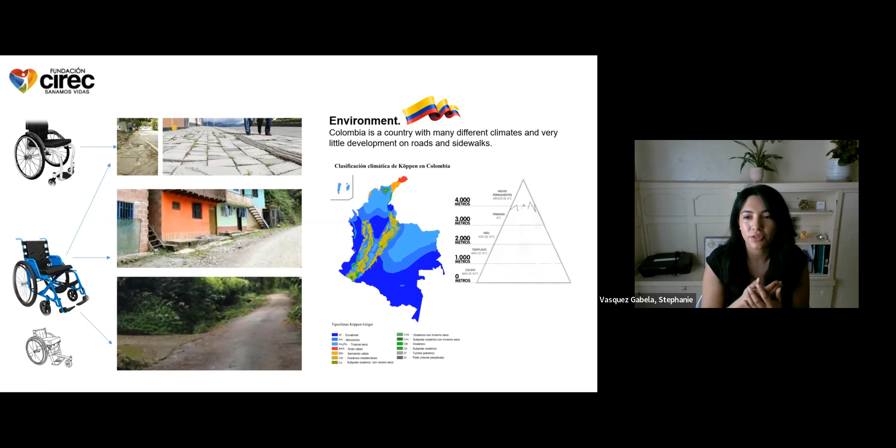The conditions would be like - you typically have a lot of grass that has grown a lot, mixed with wheat, that kind of texture. So it tends to be difficult, and even the conditions on the skin of the people can be a little bit rough because of the coldness. So we have all the climates you can imagine, from 24 to 35 degrees Celsius up to the really high mountains.

In CIREC, we provide from active wheelchairs to tilting wheelchairs. And we work with the Free Wheelchair Mission, and we provide those blue wheelchairs you've all seen, I'm sure.

We're trying to make a hybrid between the free wheelchair mission wheelchair and an active wheelchair. If you can see on the top image, this is Bogota. We don't have the best sidewalks, and there's not much infrastructure for wheelchairs, so people tend to share the road with other vehicles.

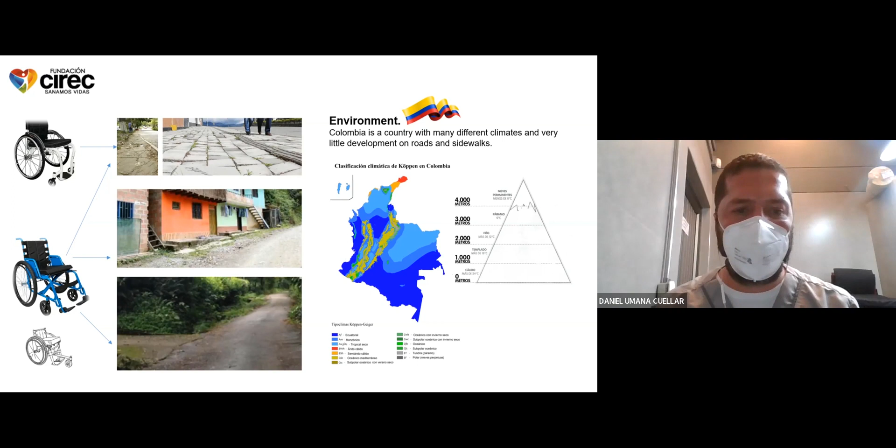In the more rural areas, we have basically no roads, and in some places not even sidewalks. So we have to work around and develop designs and configurations of the wheelchair so that they're appropriate for all these types of environments.

So we've separated what we're doing right now into 3 phases. The first phase is the wheelchair design, which is how to take patient measurements, if it's tapered or non-tapered, the design itself, if it's going to be 4 wheels or 3 wheels. The second is wheelchair fabrication, identifying which machines I'm going to need for machining, welding, and painting. The third is wheelchair testing, which we've only done alignment testing and center of gravity testing so far.

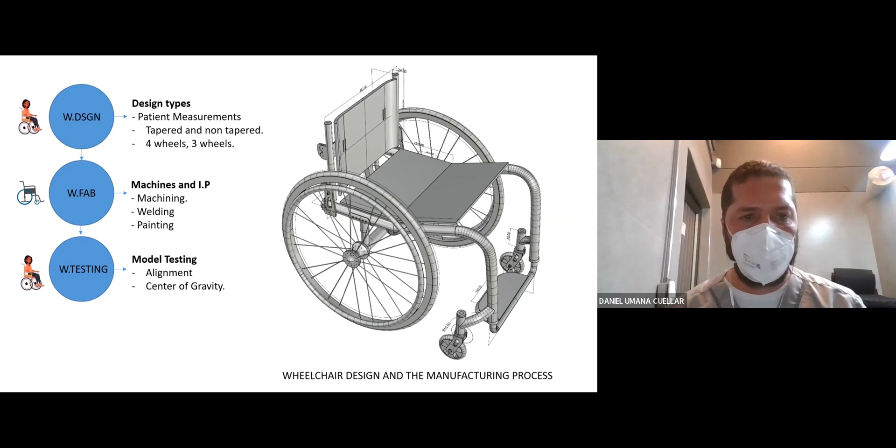The first device I'm going to show you is the wheelchair measuring device, which I'm designing. The second thing I'm going to show you is how we identified the industrial process to manufacture those wheelchairs.

We did 2 prototypes, steel prototypes, handmade. As I told you, I used to work in the bicycle industry, so I have some experience, and I made these handmade wheelchairs using steel just to prove to my boss that we can do this without technology. What could we do if we have the technology that's needed?

So we're also developing the production line and the possible machining solutions. We've designed a welding jig, and I'll show you at the end the hybrid wheelchair design that we're working on.

This is the first design we made for the wheelchair measuring guide. We've had a lot of problems. In Colombia, there aren't so many places where you can go and get those measurements taken, and there's been a lot of mistakes, so we're trying to develop a product that can minimize the amount of error while taking those measurements.

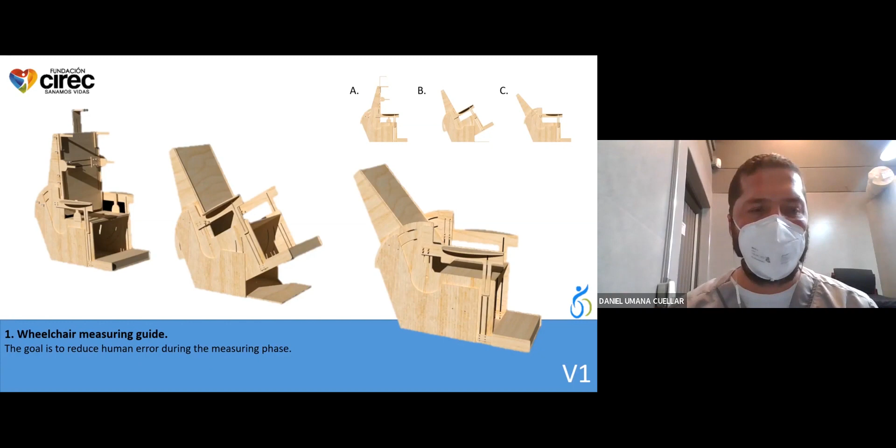This is a basic design which can tilt and can basically fit the user, and then we can take the measurements using those boards you see here. So we can change the width and take the measurement on a straight line.

We've had a lot of problems, as I told you, with the measurements. Sometimes people say add 2 inches, add an inch - it's not really standard. So that's the purpose of this product.

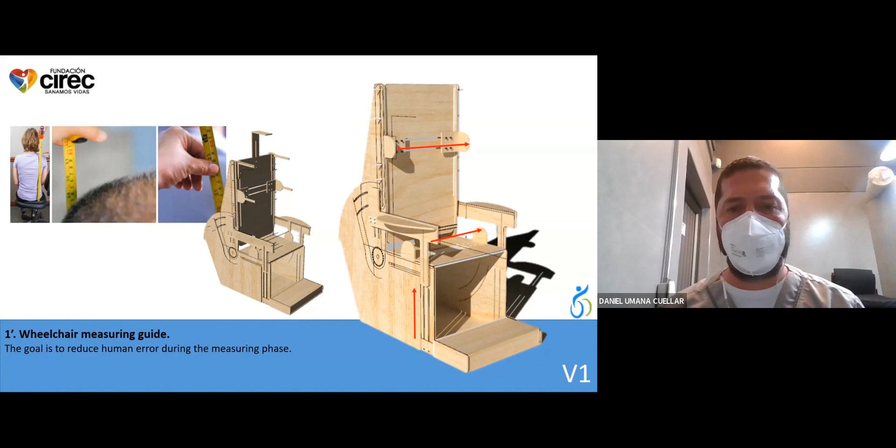This is the second prototype we're trying to work on, a lot simpler without the tilting possibility. But again, we're trying to get flat zones so we can take the measurement flat to flat without using any other aid, and that way we can get a more precise measurement.

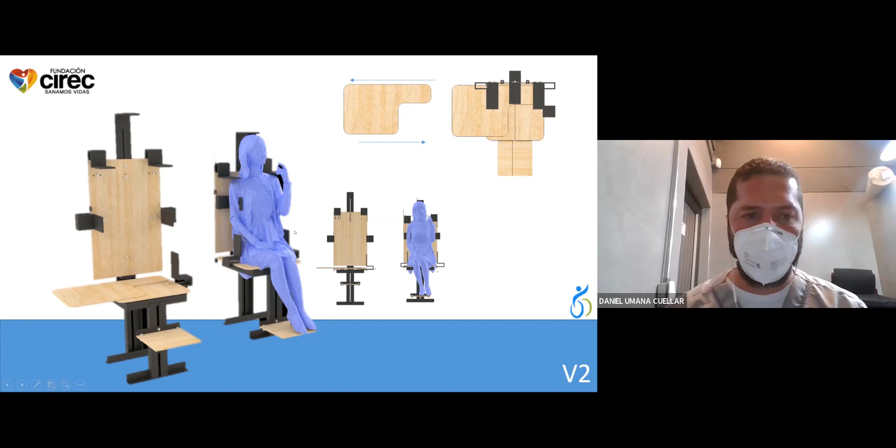This is what we're trying to work on. Our design is simple right now, just focusing on how to build these designs and which machines we're going to need to buy to be able to produce these wheelchair frames.

The basic thing is bending those tubes, bending the frame. How to build that pin or control mechanism has been a really hard part. The center of gravity - how can we change that without making the wheelchair really long? That's been another challenge.

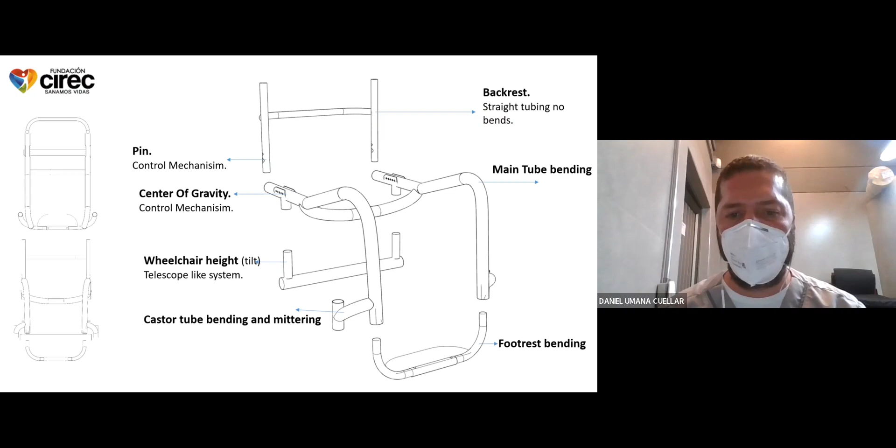The wheelchair height, which will determine that tilt, has also been a challenge, and the caster tube bending and mitering of the tubes was another challenge we experienced. So as you see, it's a basic design.

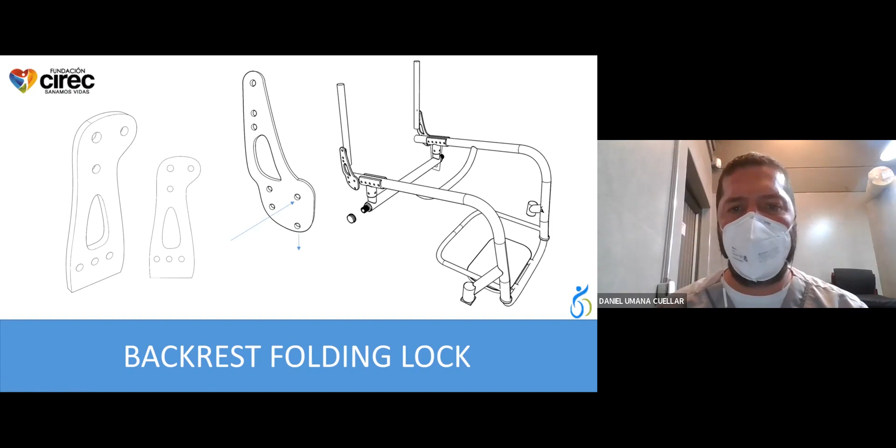I'll show you some of the prototypes we've made. We've also made this, I call it a folding lock, so we can fold the backrest and make that wheelchair easier to transport.

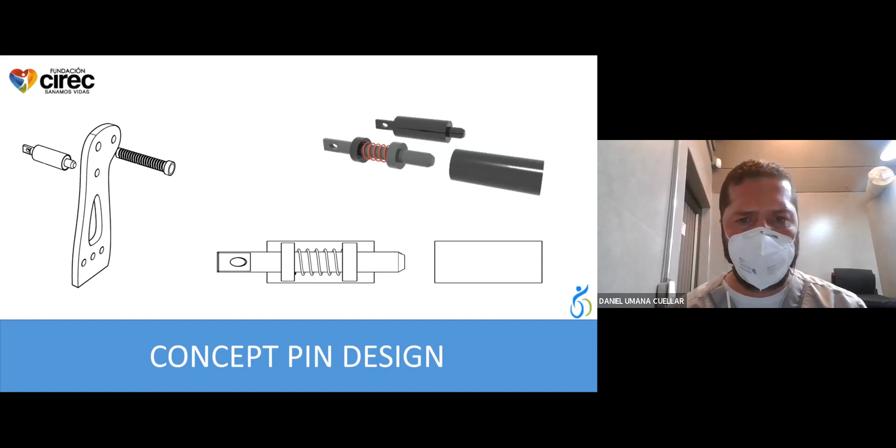This is our pin design. We had a lot of problems making that pin and making it work. Our boss told us to try to build it ourselves so we don't have to buy as many accessories. So we're trying to design and build the pin ourselves - it's a basic pin just to control the backrest.

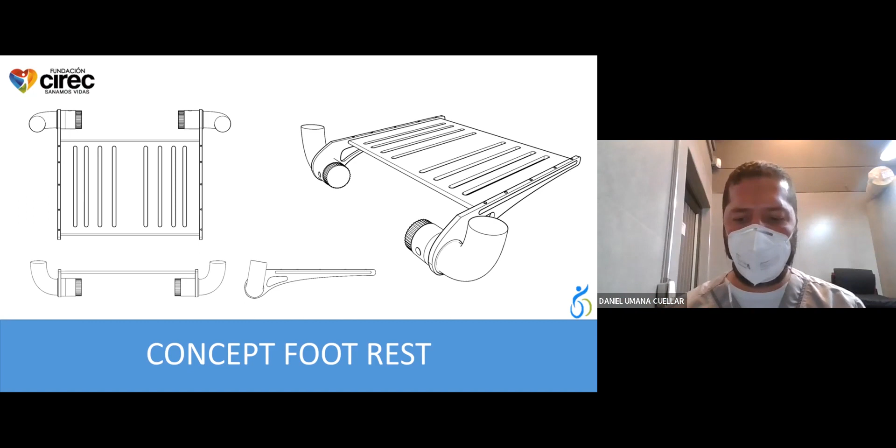This was a prototype we were working on for the footrest, basically having that tibial tarsal alignment as well, and the basic wheelchair that we're working on.

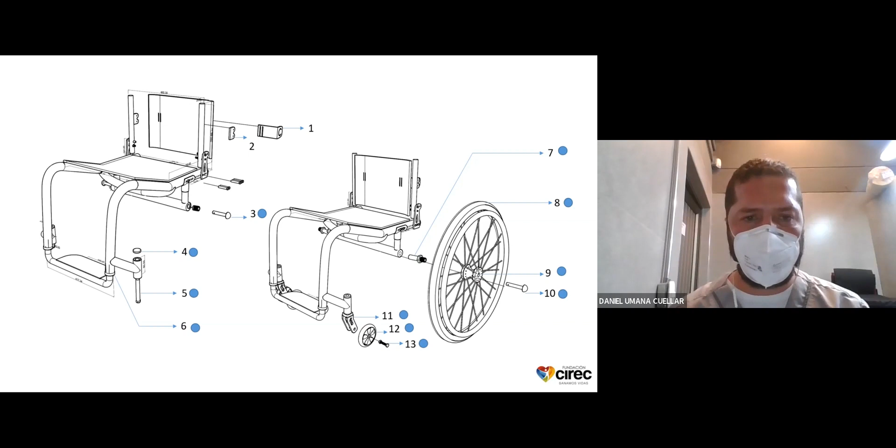Trying to separate each piece that we're going to need to build - how many screws, how many pins, how much tubing we need for the testing. And by testing, I mean the testing of the welding process. So separating everything and trying to get every piece.

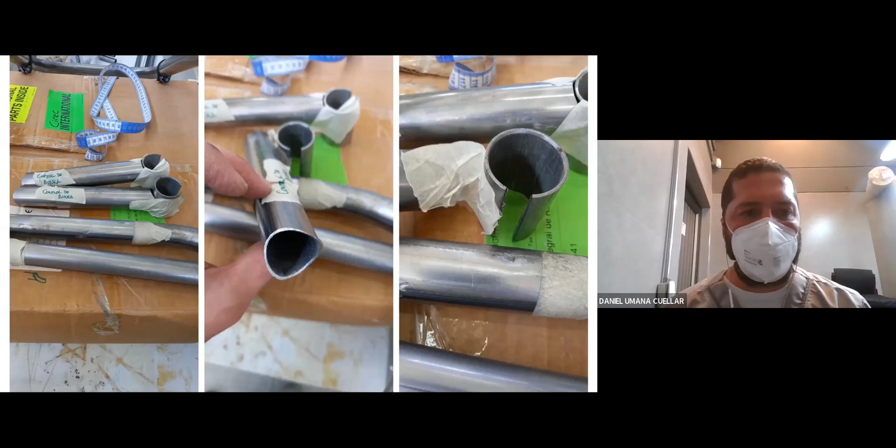As you see, I work by hand. So cutting all these tubes, we use steel because it's really hard to get aluminum in Colombia. We don't have any aluminum here. So, but we have a lot of steel. So we're working on those prototypes using steel.

And if you know, the Free Wheelchair Mission uses steel as well. So we're trying to use this as long as we can, so that when we can buy the aluminum piece, we can translate this fabrication process into the aluminum.

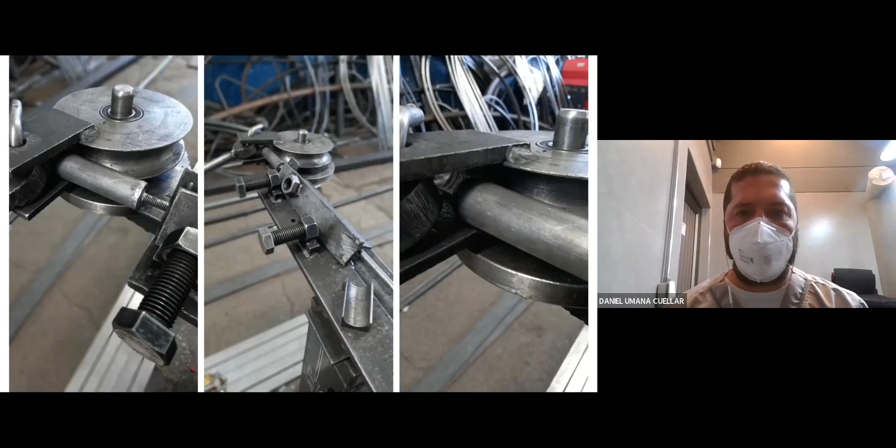This is the bending machine we've used. It's not high tech, it's really low tech, but we've used it to bend the tubes. And by using this, we realized we needed more technology and a better bender so that we wouldn't generate wrinkles in the frame.

We've developed a system using this machine to bend the tubes where it's been welded. Steel tubes are welded on the top. So that weld we've placed facing the inside of this cylinder, so that when it's bent, the weld of the tube is inside, and that won't generate wrinkles.

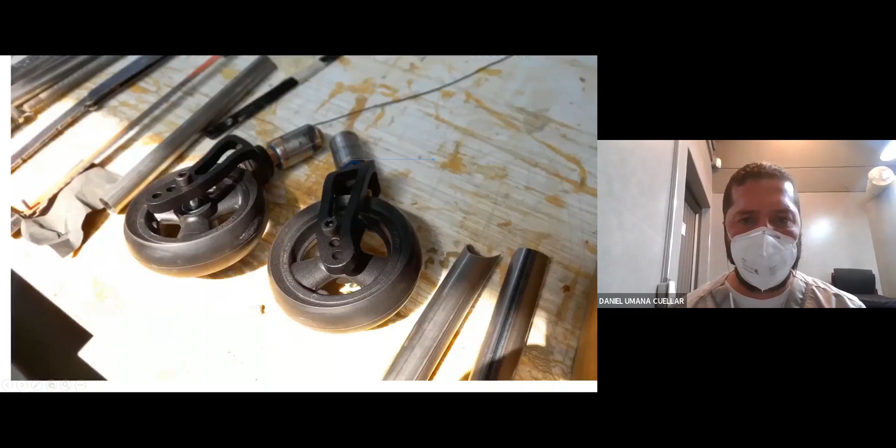We've also cut these using laser cutting machines, those locks that are going to control the backrest folding. And we've used MIG welding to build our frames.

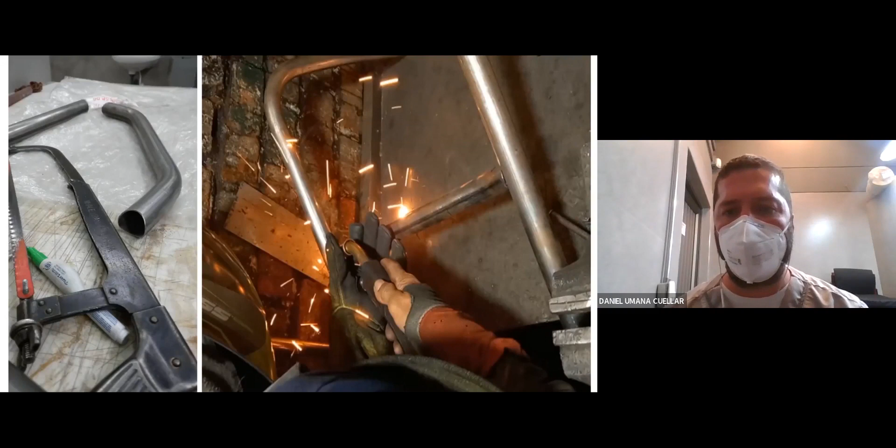As you can see here, there's a point where it's being pressed, so the tube is kind of wrinkling around. It's not properly bent. That's something we've been working on, trying to find which bending service is better, because we don't have a bender here. So we have to work around whatever we have available.

The taper design was the first design we worked with, because it had a lot of bend in the tube. So we worked with that one first so our boss could see how complicated the process really was. If you see, these ones are going to hold the caster wheel and the bearings.

Those we had to weld and lathe. I welded an inside, like I put a tube inside, and then I brazed it. And then I took it into the lathe and reduced the inner diameter so I could fit the bearings.

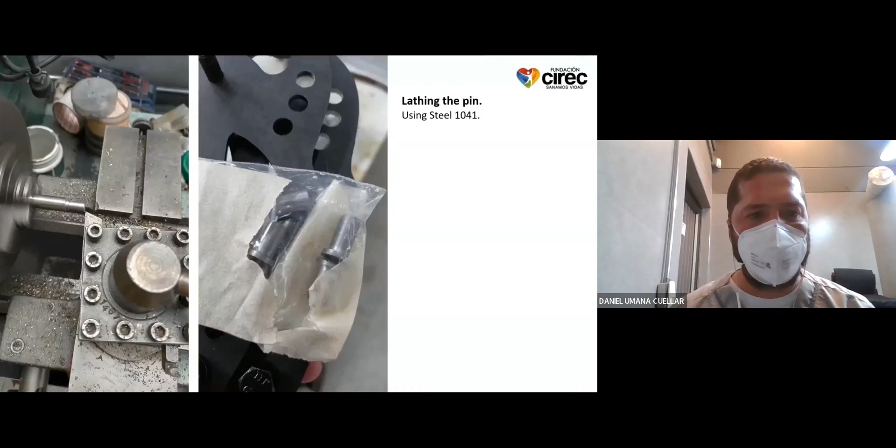Again, all this is done by hand. We're working on that pin design. This is the first pin we tried to build, which didn't work because it didn't carry enough strength, so when you were leaning on the backrest, it just popped out. So we had to work on the design.

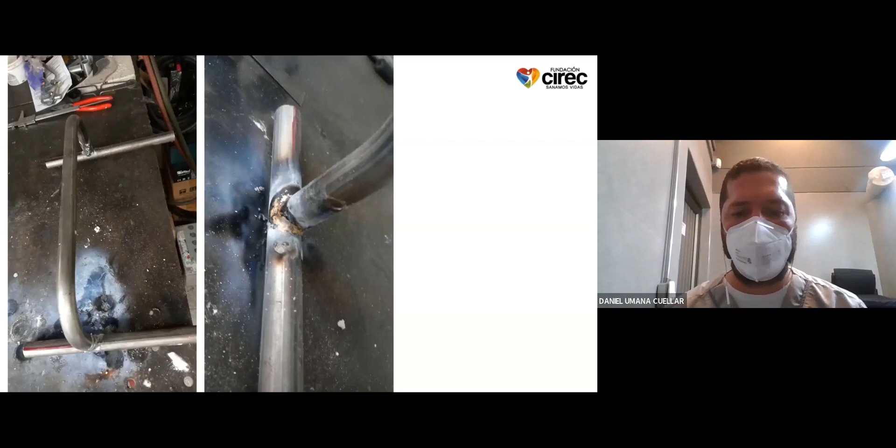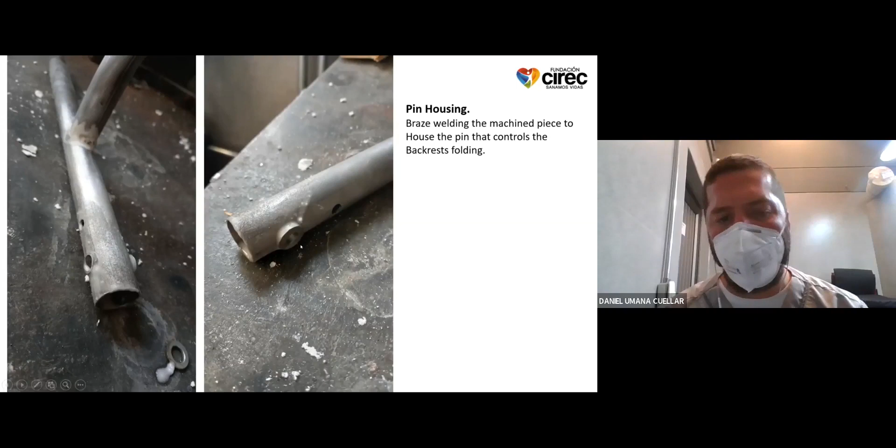We've also tried different types of welding. This is braze on the backrest. This is the welding of the pins, like housing. So the pin's going to go inside this housing, and that was welded using braze, the same brazing process.

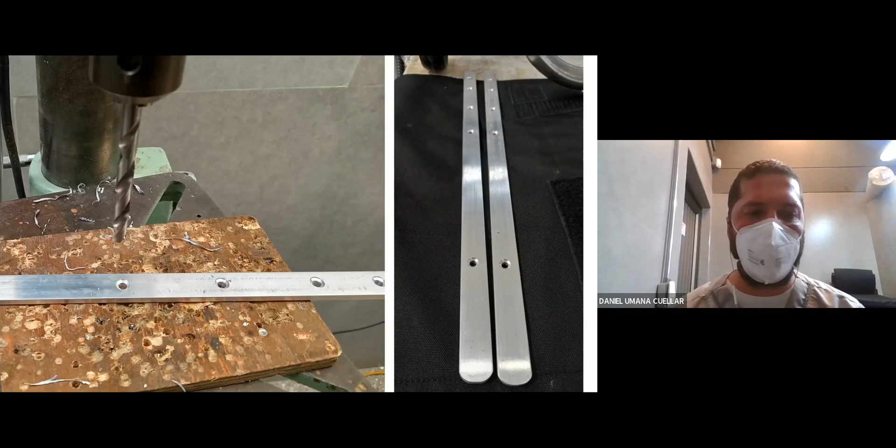Then we had to work around the seating and the locking mechanism for the seat. That's an aluminum piece we got. There's some aluminum you can get in Colombia, but you can't get every type of alloy, so we're just working with the alloys we have available.

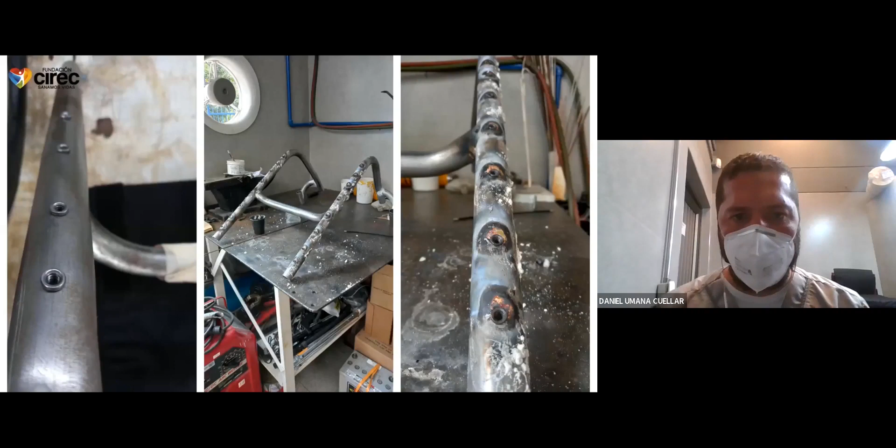So I welded these braze-ons. These are screws that are brazed onto the frame, so I can—if you see there, they already have the, I don't know how you call it, the thread.

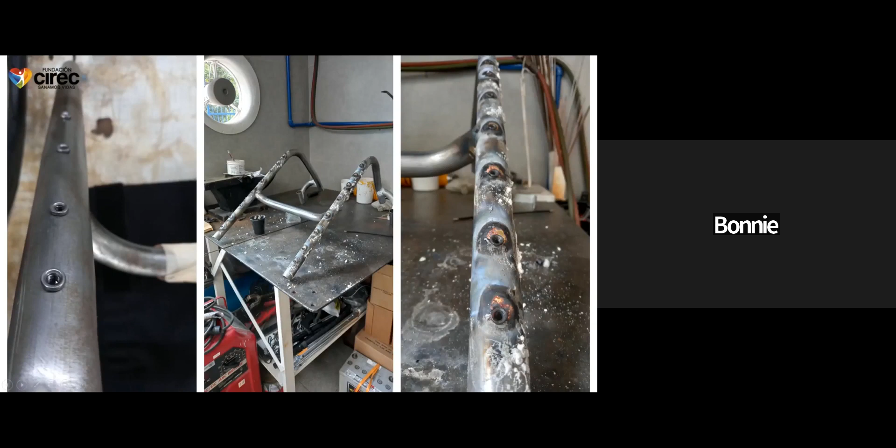Okay, so I had to weld those. And if you see...

Trying to make the holes on the frame was quite difficult. We have to work on a jig so that we can keep it straight. It's not really straight, so that's something we have to work around, building jigs so that those holes are straight.

Then I welded the frame, the complete frame. It's more or less 90% complete.

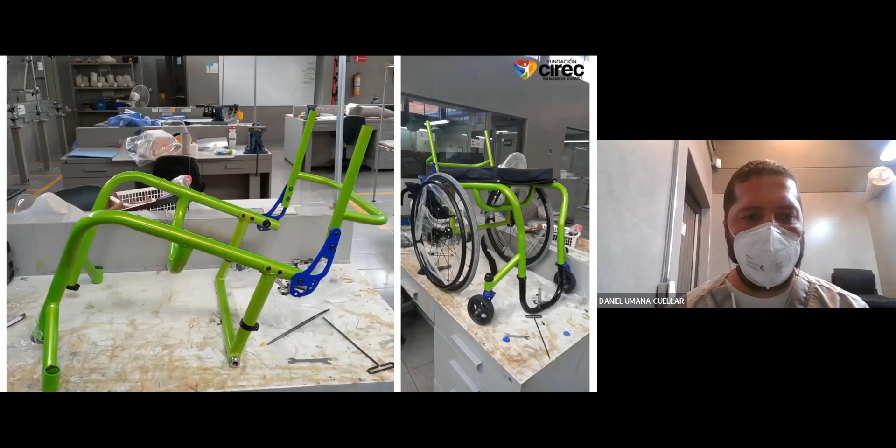Then we took it to paint. We had a lot of problems with the painting process, because we tried to sand those welds, and then used the plaster they use for cars to hide the weld. And when we painted, that thing popped out and the paint got all messed up, so we had to do it again.

Painting is something we want to do as well, so it's been trial and error trying to find the powder paint for the steel frames.

Here you have the locking mechanism and those 3 positions, with the 4th position completely bent when the backrest is completely bent forward.

Another thing we had to work around was the height of the wheelchair. The first wheelchairs, we were sitting on top of the wheel. If you see, it's really high. So we cut this one and tried to reduce the height so it's like on bicycles, where in the rider compartment you're contained between the two back wheels, not sitting on top of the wheels.

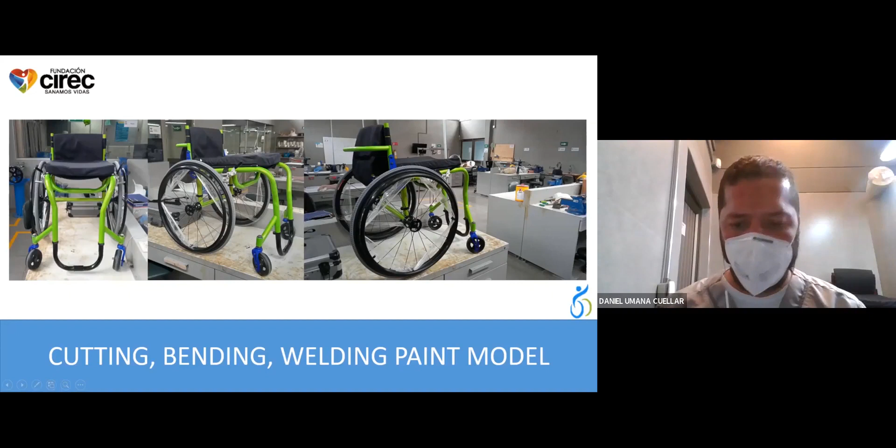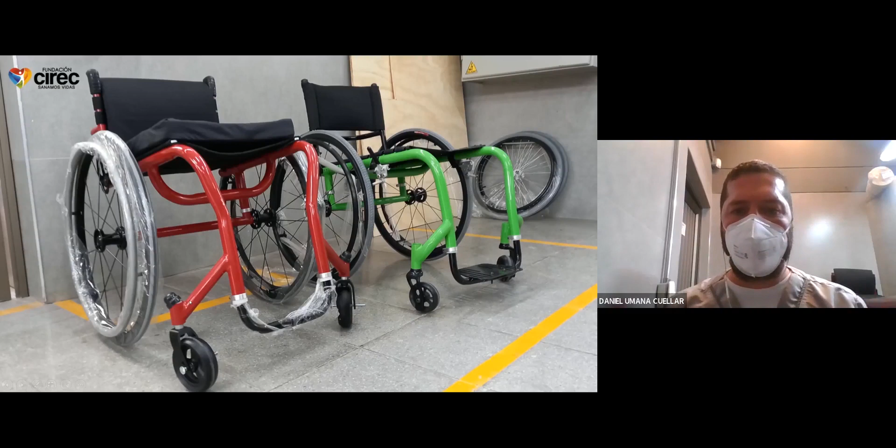These are the two prototypes we built, I mean models, so we could test different things with them. One with the tapered front and one with a straight front. Another one with a curved caster arm, and one with a straight arm, so we can compare how those two behave.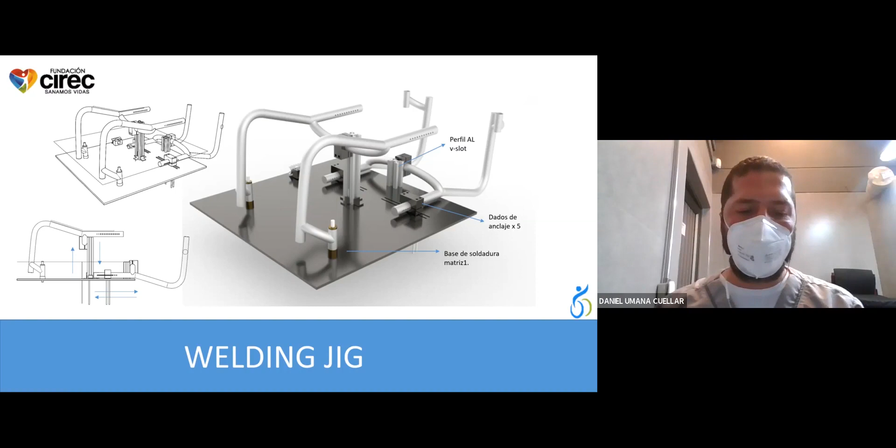This way we can guarantee the alignment, which was something we proved, because I welded the frame without a jig, and when we put together the wheelchair and pushed it, it tended to roll to the side. So the jig is really important, and it's something I'm working on in the whole design, so the next frames we build are going to be built on a jig, guaranteeing the correct alignment of the frame.

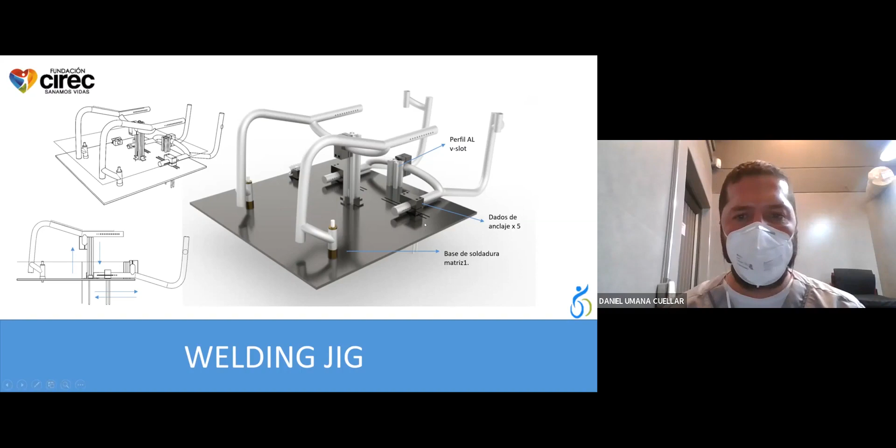We've also worked on the WPS for the welding standard. That's something we have to define with the tubing, because we're trying to get Chinese aluminum, 6061 and 7003. Those two different types of aluminum are going to have a different type of WPS for each, which we have to work on when we get the pipes, because right now I'm working with steel.

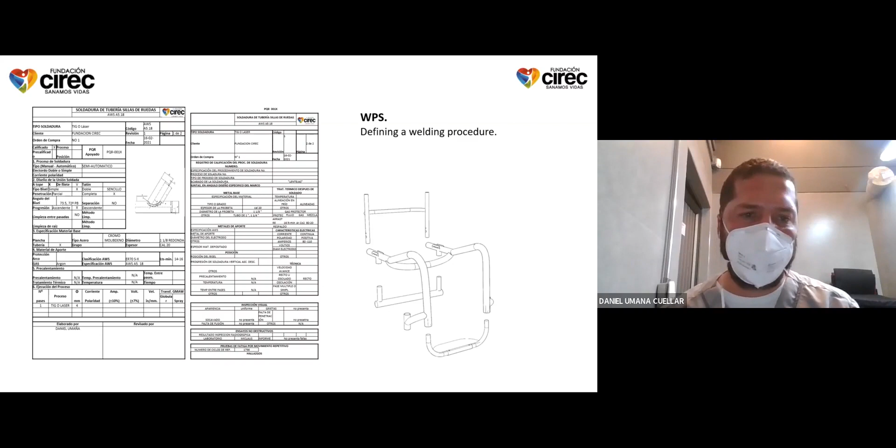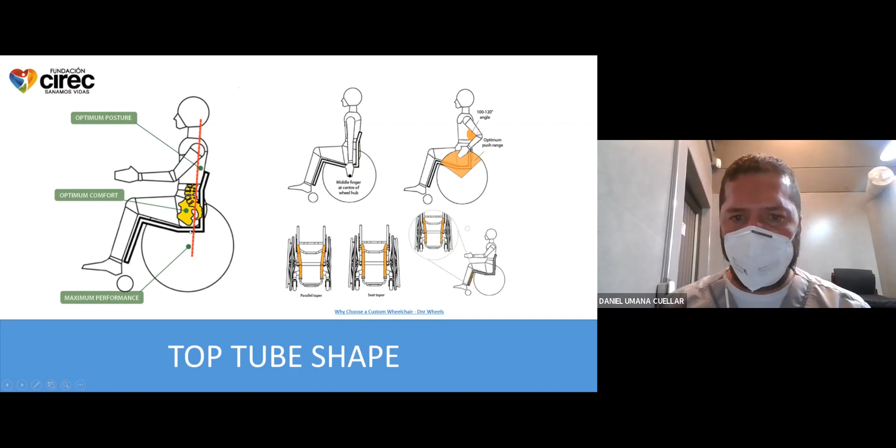Now, regarding the design, I've worked with designs where the pelvis is lodged into the straight part of the frame. As I told you, we have the tapered and non-tapered wheelchair. This was the first design we tried to build.

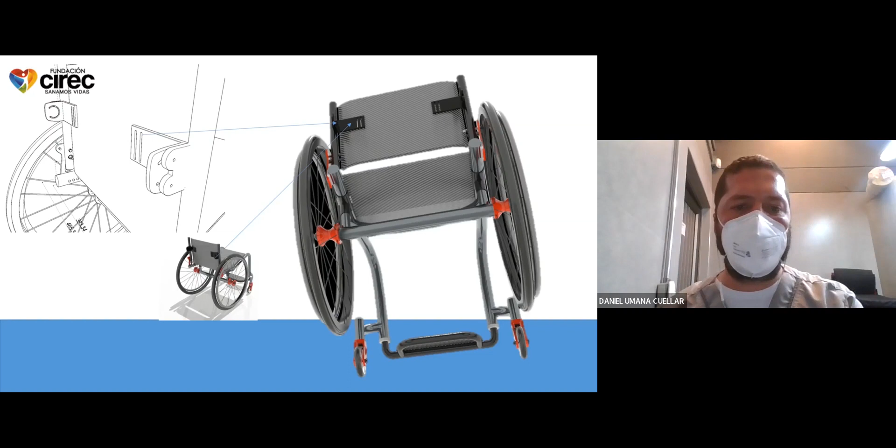The backrest was another complication, because when I was talking to Sarah, she said it's better if you provide a wheelchair where people can replace parts easily and do the maintenance themselves. Then it's better if you don't have a very complicated backrest. So we worked around the type of backrest you see with the free wheelchair mission wheelchairs.

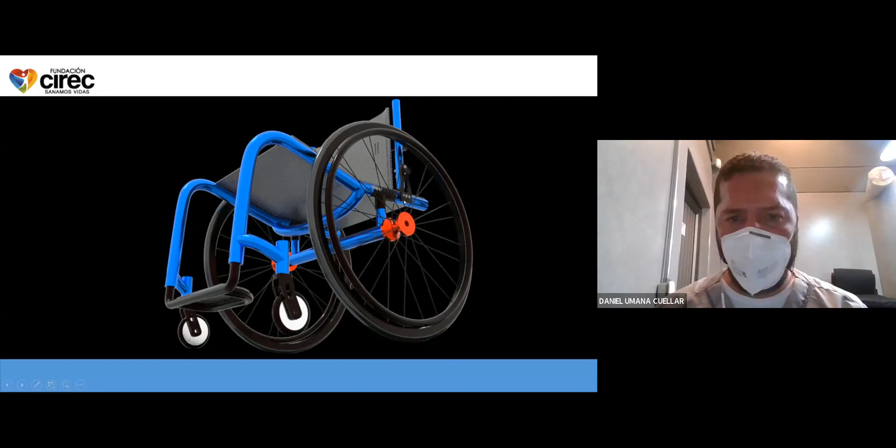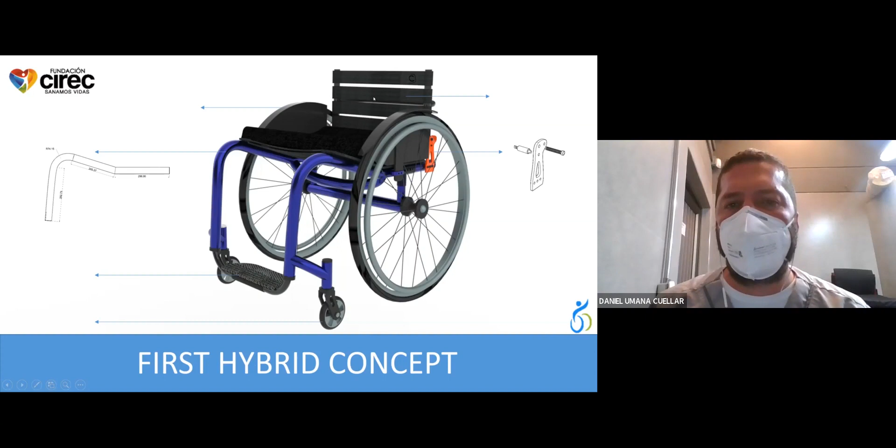Here you have the first prototype that we built, and this is the one we're working on right now. We have that strange frame and an adjustable tension backrest and seat. That's the one we're working on right now. So I'm going to show you if I have the frames here.

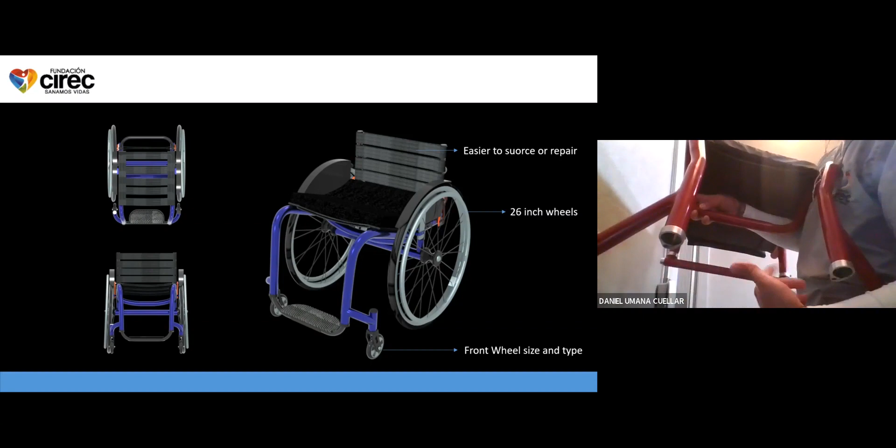We used these aluminum pieces from bicycles to provide that space and control for the footrest. We have a very large bicycle industry here, so we're using parts from the bicycle industry for the wheelchair. The wheelchair is really light, I mean, it's steel, but it's still a light wheelchair.

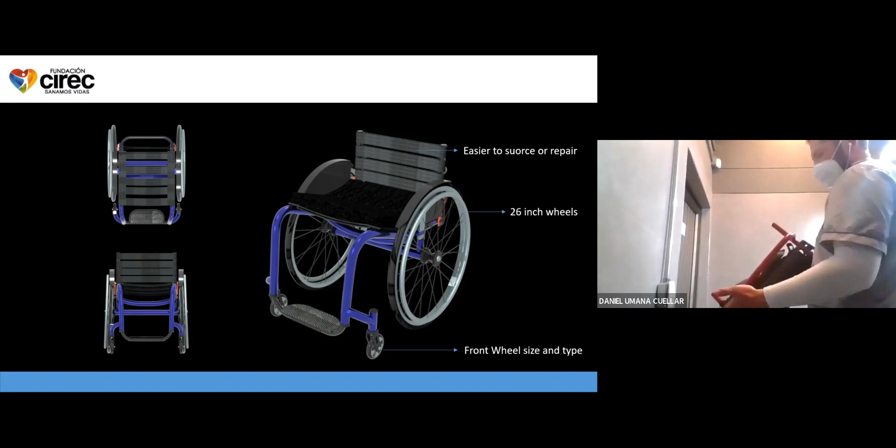The thing about the backrest is, how are we going to provide a backrest that's not going to, well, this one totally pulls out. You have to work around it. The welds were really good, but still we have to work around it and provide better welding.

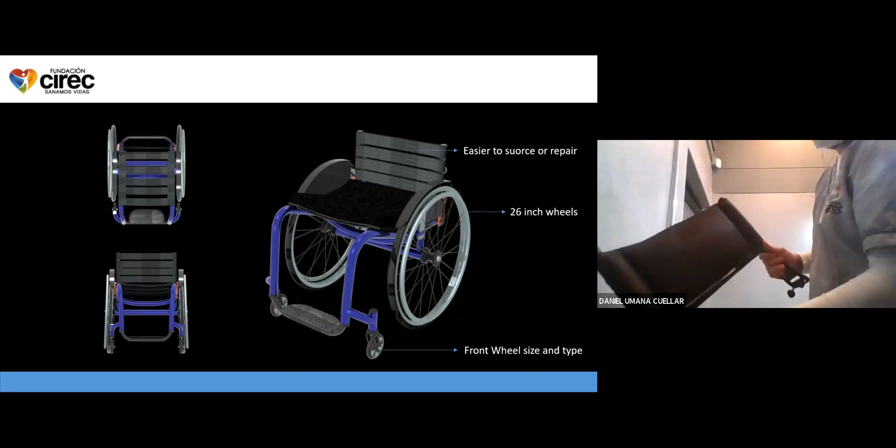We also work with this type of backrests, which are really cheap but not very good. So we have to design something that is easy to fix, but that's going to provide better support.

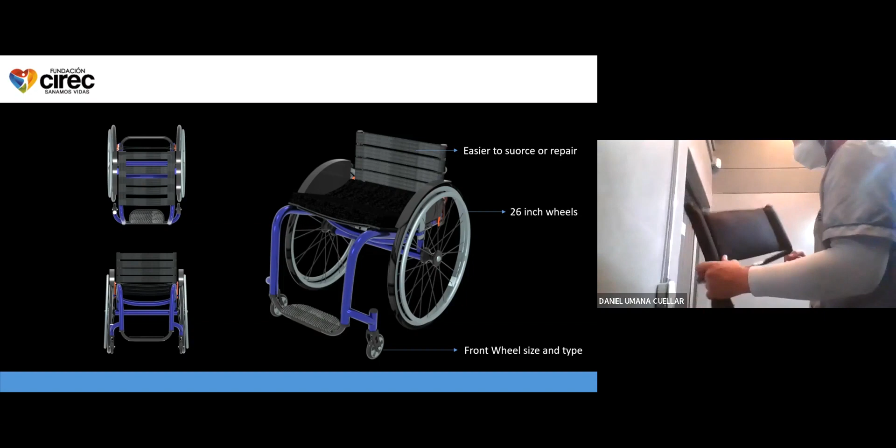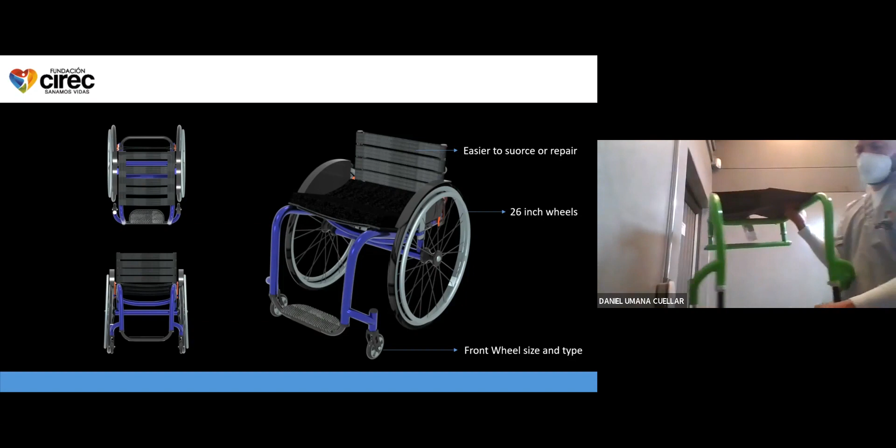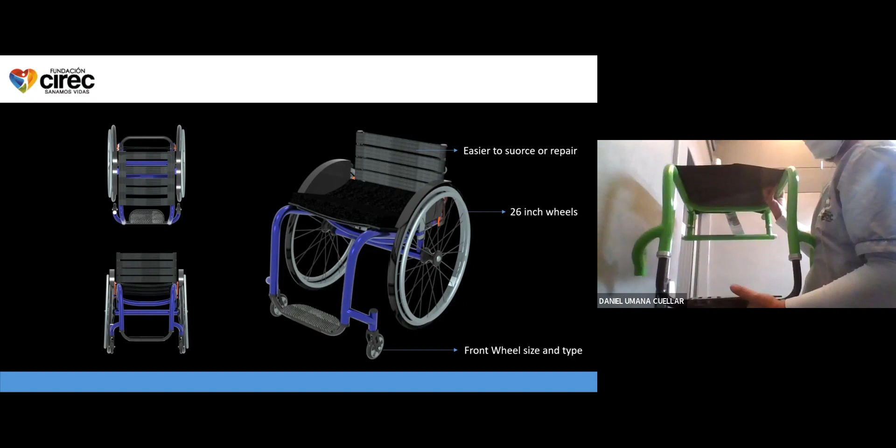And for the non-tapered wheelchair, we've also worked with the footrest, so with that one we can provide that tibial tarsal movement possibility. As you can see, the height of the wheelchair can be adjusted using those aluminum parts from bicycles, and we provided three different positions so we could make it shorter or longer.

I haven't been able to get the caster, so what I did was when I welded, this is like the same thing, la puerca.

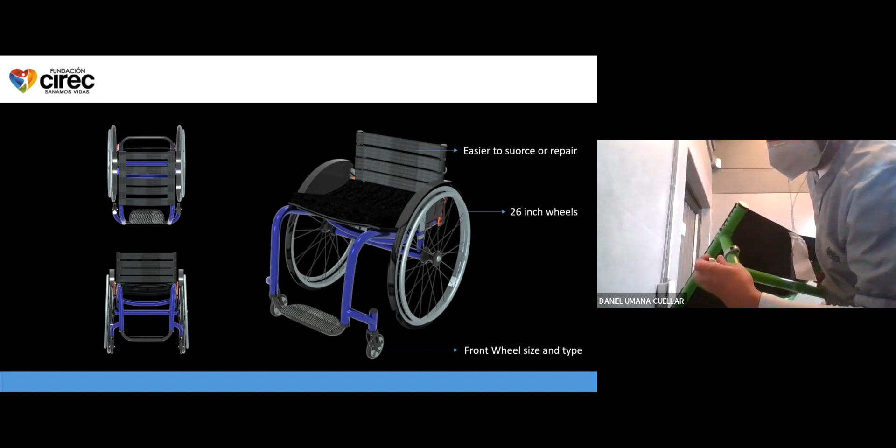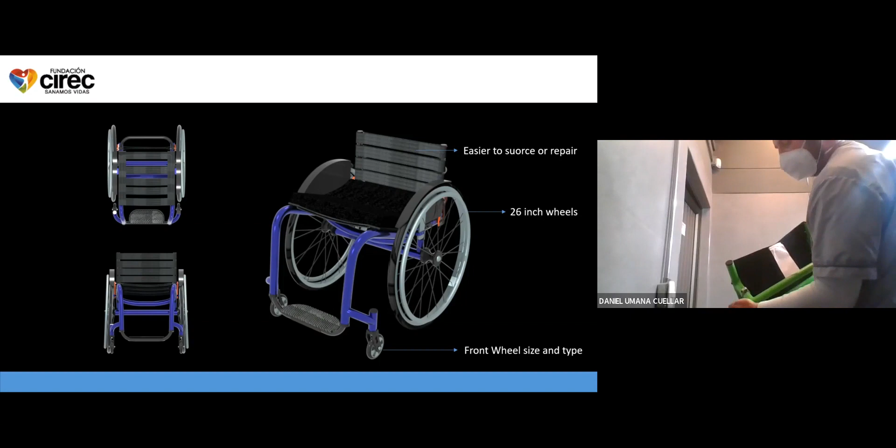When I welded it, I gave the welding machine a 2-degree angle so we wouldn't have to use an expensive caster camber piece. The nut is welded inside, and it has a 2-degree angle, so we wouldn't have to buy expensive pieces. Because basically all the parts and accessories are imported, if we can reduce the amount of pieces we have to import, that'll be a lot better.

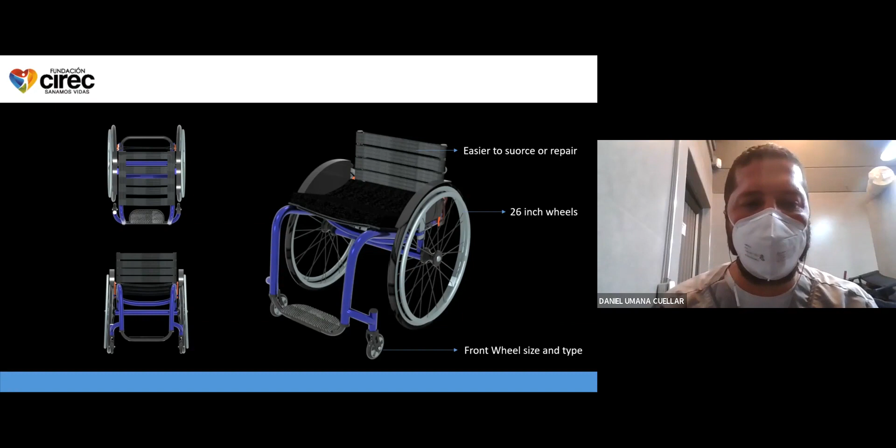I'm thinking about a hybrid between an active wheelchair and the Free Wheelchair Mission wheelchair. I know it's not that technical right now. What I've been doing so far is trying to work around how to build a wheelchair, how to provide an affordable wheelchair for the National Health Service. Once we work around all the steel wheelchair products, we can start working with aluminum products. But first we have to develop a system to produce these wheelchairs and then move on to better materials and the more expensive aluminum tubes. So that's what I have so far.

Thank you for sharing this, Daniel. I think it's very interesting that you're now evolving with different materials and exploring how to put them together. I want to invite the other members in the group - I know some of you are part of manufacturers or have been testing different wheelchairs. Is there any recommendations you could provide for Daniel as part of his product development?

This is Don from Free Wheelchair Mission. Daniel, you're doing a fantastic job, unbelievable - the rigor you've got from the design with the wood and the modeling to the fabrication. I know how hard it is to manufacture something in countries like Colombia and get parts. So, boy, I'm blown away with your progress. Fantastic.

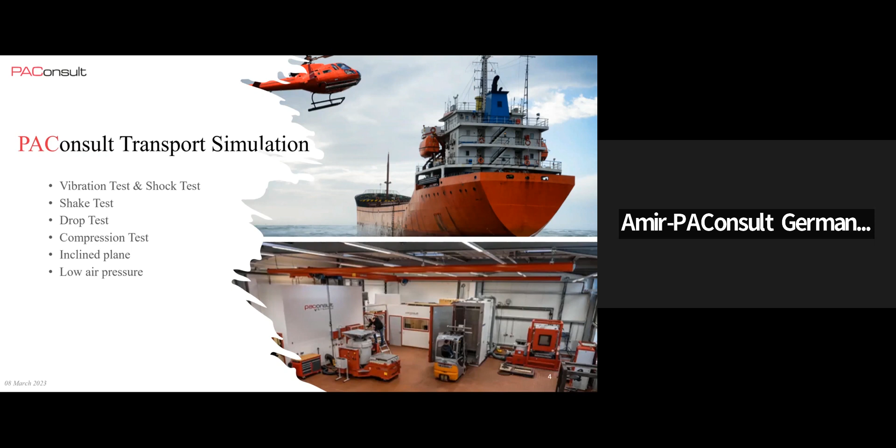Now we'd like to show you a video that we took from our testing laboratory here in Hamburg, in the Humboldtstraße that we are. So let me just start the video. So I don't know if you had any sound, there were just some background music, but let me just move on.

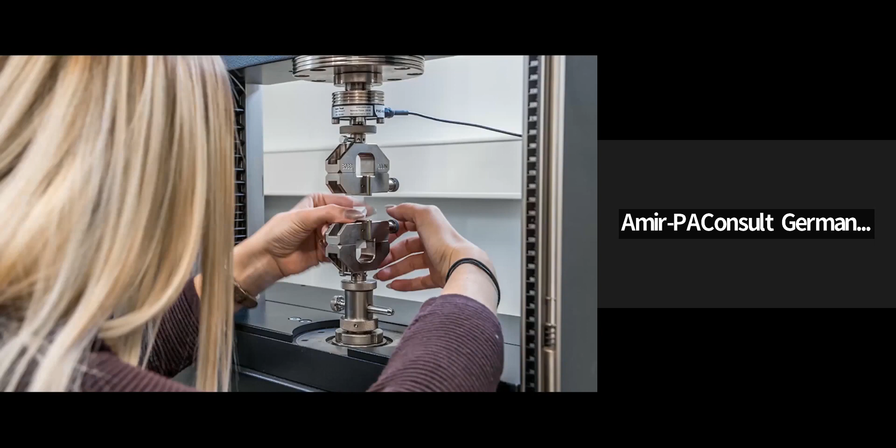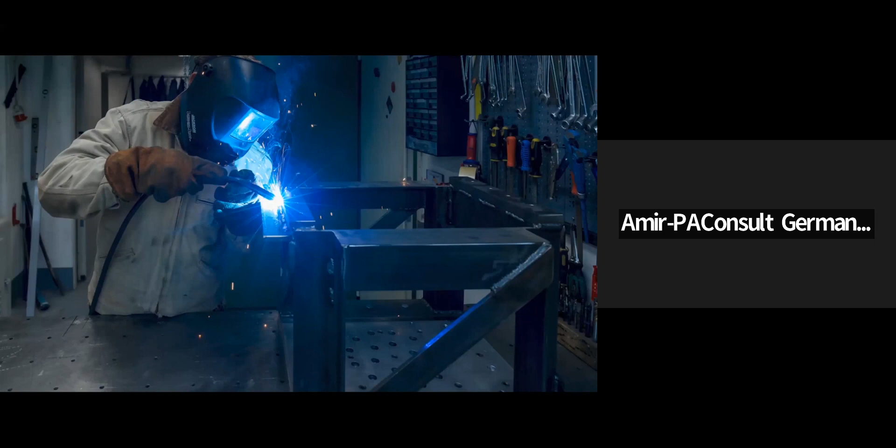Okay. Can you hear me now? Yes, we can hear you. Okay.

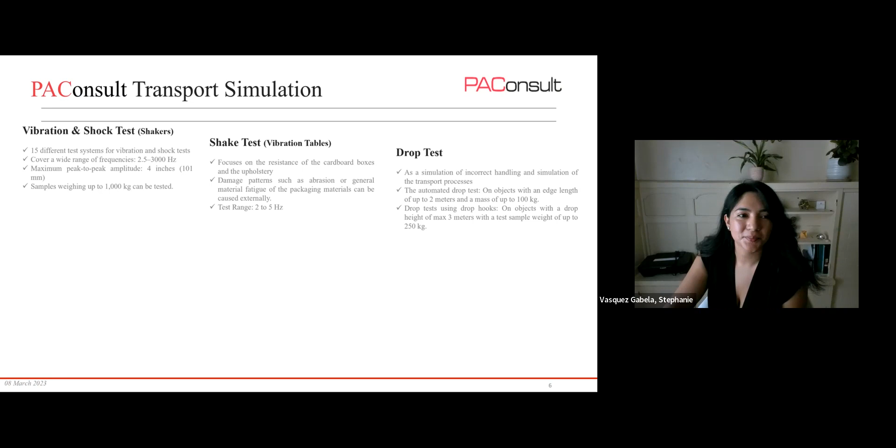As you might have seen in the video, it was an overall preview to the daily tasks we have in our lab in Humboldtstraße. One of the tests that we do is the transport simulation, and it consists of different parts, starting with vibration shock tests. In overall, we have about 15 different test systems for vibration and shock tests, which cover a wide range of frequencies of up to 3000 Hertz. The test devices differ in the characteristics of force vector, amplitude, and frequency range. Both electrodynamic, servohydraulic, and pneumatic test systems are available in our laboratories for the mechanical tests.

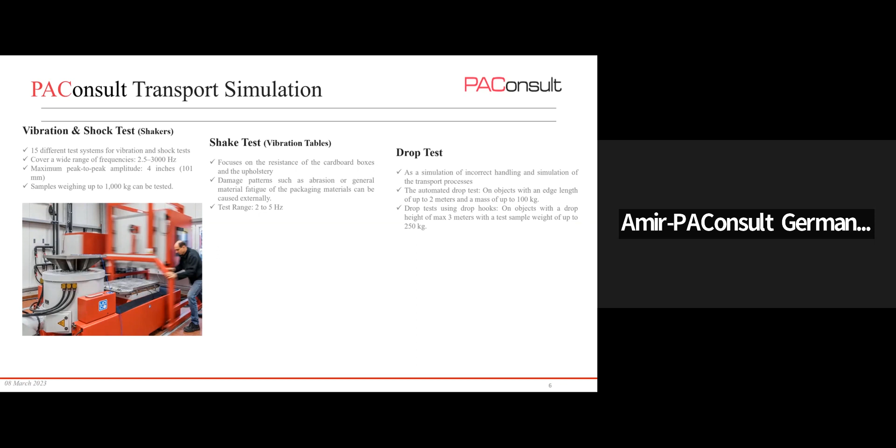Our vibration tables for shaking tests are also used, and they are focused on the resistance of the cardboard boxes and upholstery. These shaking tables or vibration tables cause damage patterns such as abrasion or general material fatigue of the packaging materials externally. In contrary to our shakers, our vibration tables can run tests in a very low and limited range of up to 5 Hertz.

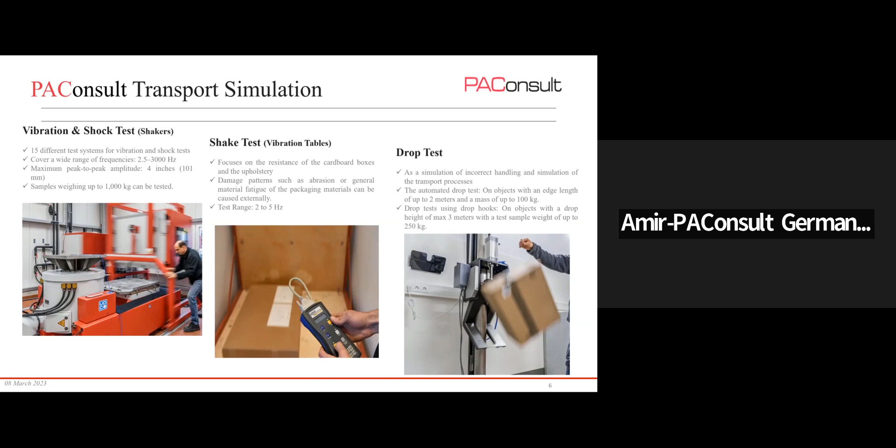Delivery boxes can meet incorrect handling during their transport processes or by delivery staffs like UPS, DHL, Amazon, etc. Therefore, a series of drop tests are defined on some edges, faces, and corners as explained by the standards, and they can simulate this mishandling. We have 2 different dropping systems: an automated drop test, which is used for smaller objects with their mass of up to 100 kilogram, and a drop hook for heavier objects of up to 250 kilograms. In most cases, we use them for the pallets.

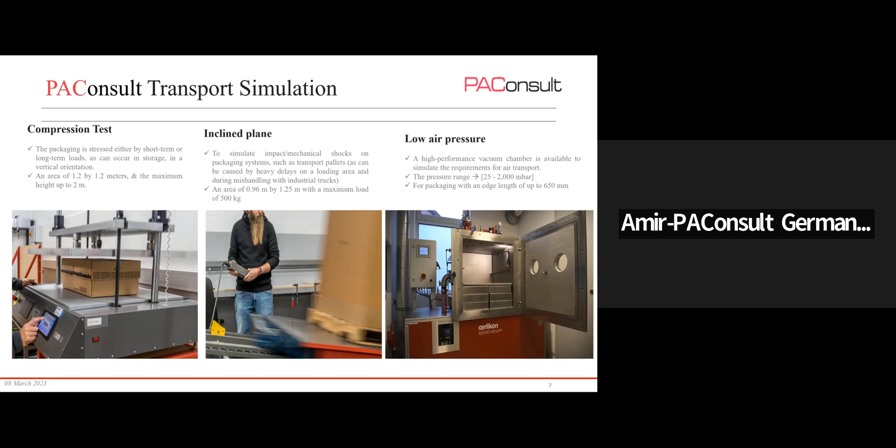To simulate mechanical shocks on transport pallets, the inclined planes are used because we believe that this can be caused by heavy delays on a loading area and during mishandling with industrial trucks. A high-performance vacuum chamber is available to simulate the requirements for air transport, and the pressure range in these chambers is about 25 up to 2000 millibar, and it's only available for smaller packages and for samples.

By means of a laboratory simulation—actually, let me first mention this—PAConsult has climate chambers of various sizes in which extreme temperature, humidity, rapid temperature fluctuations, condensation, and icing can be simulated. Climate chambers are applicable for reproducible investigations into the suitability of products to climate and weather relevant criteria.

Let me open this in more detail. Most of the times, but not always, before any mechanical testing or transport simulation, there is atmospheric preconditioning. According to the standard or the client's preference, the samples are stored at various combinations of temperatures and humidity profiles, or even in the laboratory ambience, for a specific duration before starting the test. The combination of temperatures and humidity profiles can simulate different geographical sites that the package is planning to experience during its journey to its final destination.

These profiles can go as high as 180 Celsius degrees and 98% humidity, and as low as minus 70 degrees and 10% humidity. Actually, the 10% humidity is very hard for the chamber to perform, but we also run that.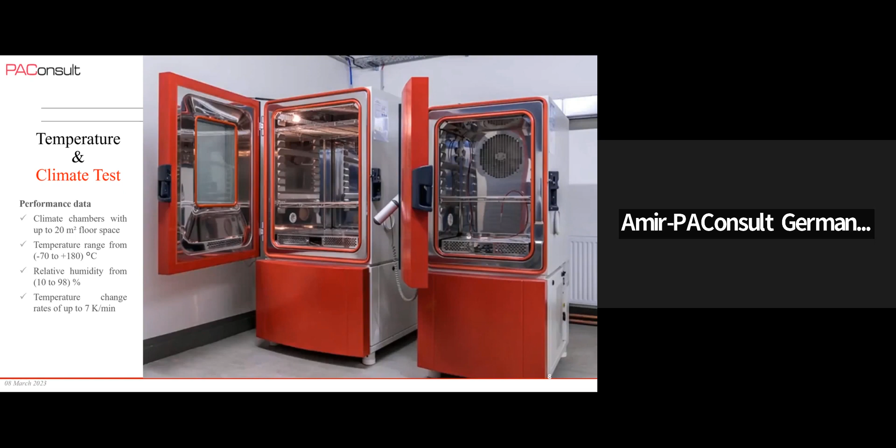I thought this might be too much information, so I want you to take a journey through the ordinary life of a package with us at PAConsult. By means of a laboratory simulation, the shipping unit, usually containing medical devices but not always, is tested for transport stress. The transport simulation is performed according to the specification of the client, which defines the standards and parameters they want, or by the standards directly, but more commonly based on various ASTM and ISTA standards.

In our nomenclature system, the test items are referred to as EUTs, which stands for equipment under test. The dimensions of the EUTs are determined by measuring from edge to edge with a calibrated measuring tape, and the weight is determined using a calibrated scale.

The incoming goods are controlled for any visible damages on the packages before going through the test. The test equipment used in the laboratory of PAConsult should all be listed in the report, as well as the working hours spent on the project, calculated in the offer. Also, the test procedure is described in our final reports.

After the preconditioning I mentioned before, the transport simulation starts. The first step is mechanical handling. For single packaging testing, the drop tester is used, and for pallets, the hook drop test is applicable, which we call the rotational flat drop. You can see that on the left.

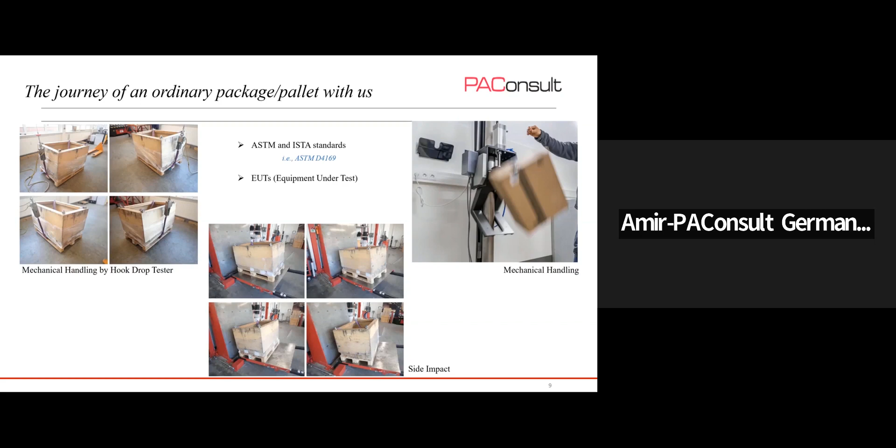Next, the side impact is performed, shown in the middle, at a pre-calculated velocity and on specific faces of the pallet. After mechanical handling comes the vehicle vibration with our shakers. The profiles used in this step, seen on the left, are usually predefined and simulate vibrations on the packages during delivery by truck or by means of air transport.

The next step is warehouse compression simulation using our compression tester. For the stacking test, each shipping unit is positioned in the middle of the compression tester and compressed until the required test load is accomplished.

For some tests, the durability of packaging and cardboard tapes should be tested by a concentrated and accelerated impact to evaluate the resistance of the packaging against sharp impacts. We call these concentrated impacts. Both ASTM and ISTA have defined an impact test using a very specific steel projectile, which is released onto the package at specific faces and from a specific height. The test result is a pass or fail determination based on previously established acceptance criteria.

Usually after the test, the shipping units are not opened in our department, but in some departments they are. The final visual inspection of the content and evaluation of the result is performed by the client. Nevertheless, any visible changes, from the smallest wrinkles to deformation and ruptures that occurred during the test, should be reported. You can also see one of our climate chambers on the right side.

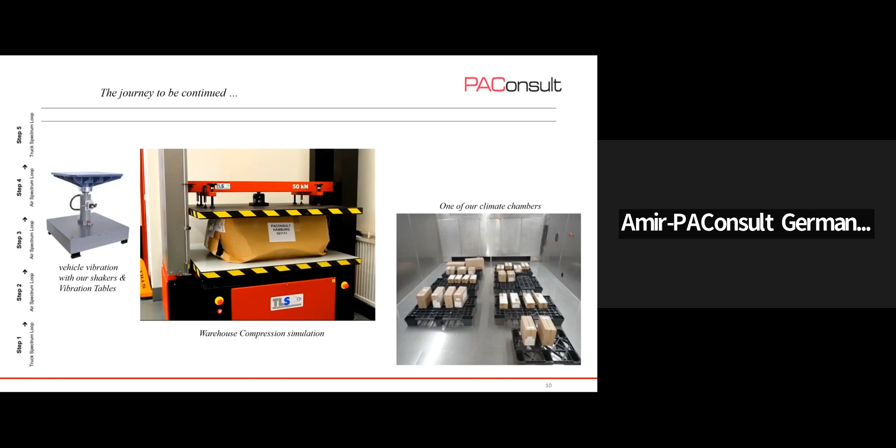I already talked about accelerated aging, but after transport simulation, some packages are opened in our department for medical testing, meaning testing of medical product packaging. In this regard, first the SBS, or sterile barrier systems, are visually inspected for any damage or sign of non-sterility resulting from the transport simulation.

Our labs are accredited for a huge range of international standards, including but not limited to the following list of standards you can see. But if you want to see them all, please refer to our website because I know it's not readable here.

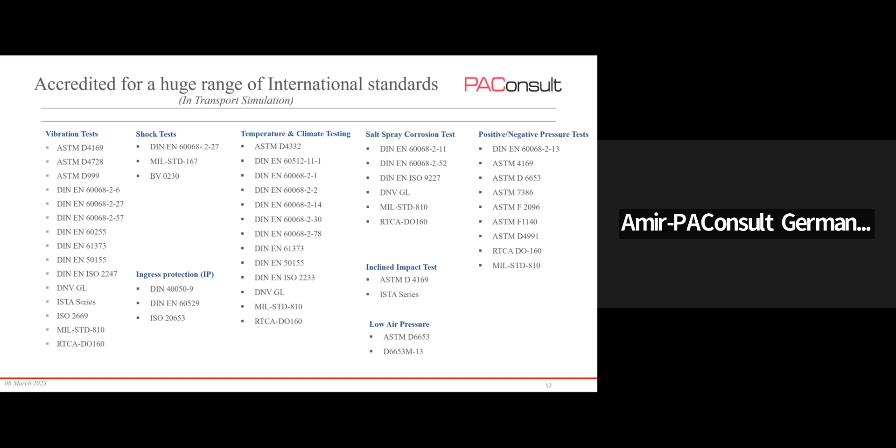Our labs are accredited to ISO 17025, but we have other certifications, including DAkkS, which is specifically for the German accreditation, ISTA, Airbus, and Amazon FFP.

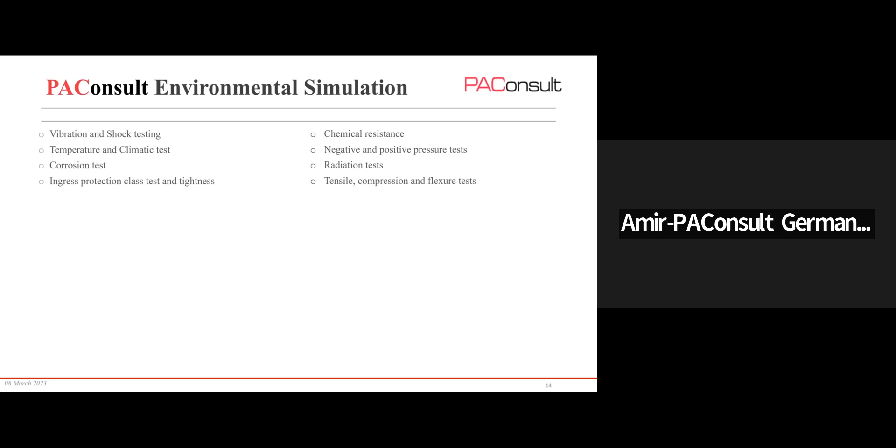This part of my presentation goes to the other labs and fields that PAConsult is actively working in. However, I only chose those quite relevant to wheelchair testing, while most of them are beyond my knowledge, so I only mentioned them quickly. The area of environmental simulation is beyond the transport simulation and mainly consists of engineering testing and prototyping. Some of those tests are mentioned here.

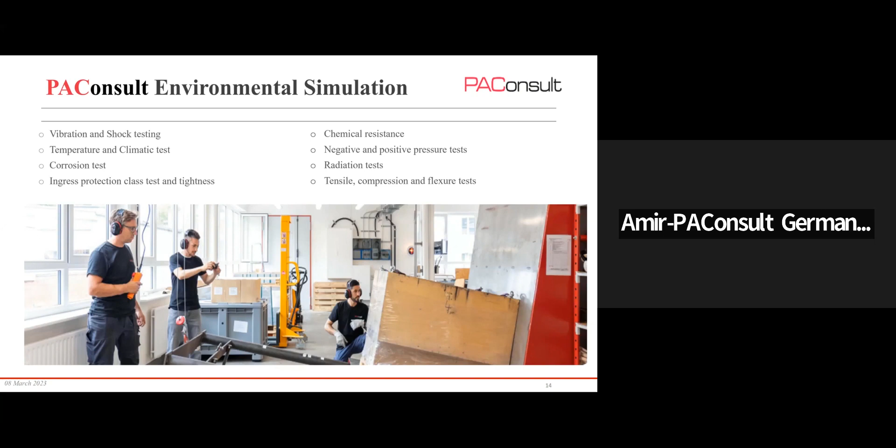Also, PAConsult Synapse, our branch in Berlin, provides various lists of tests, including rocket testing, but their main focus is battery testing. This can be relevant to power wheelchairs if we are going to add them to our list of services in the future.

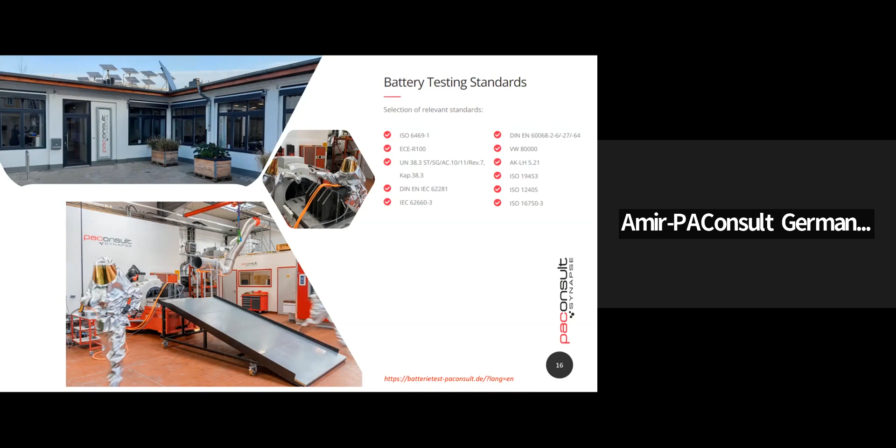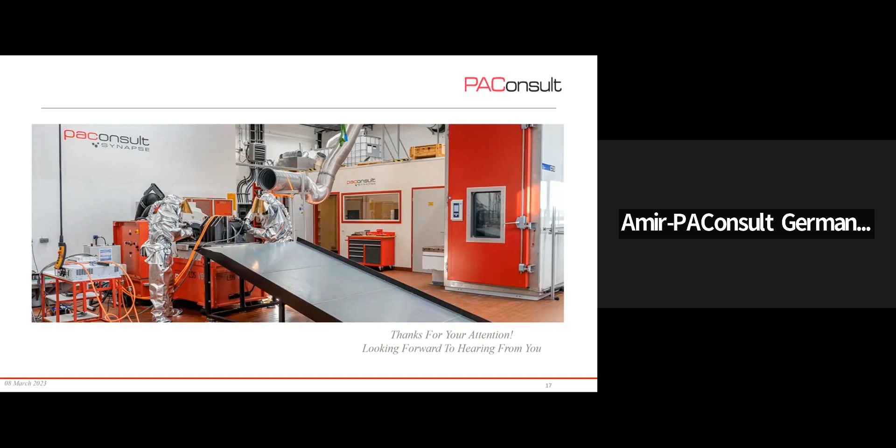We already have another video, the abstract description of which I provided to you, summarized in that video, but please let me know if you can hear the sound, otherwise we have to skip it. Just make sure the sound is here. I'm gonna take a... Nargess and Amir, I'm sorry, but would it be okay if we skip the video? I know we're running out of time.

Of course, if we would be able to go to the questions you guys had about wheelchair testing before we jump into our next presenter. Sorry, I'm just trying to keep track of time. It's totally fine. Thank you, Stefan, for mentioning that. It's totally fine. Thank you very much.

And sorry that we don't have any video for our Zoom call because our desktops in our labs are not equipped with webcams, so we only have the voice. Sorry. It's okay, don't worry. Thank you.

Okay, so now we want to hear from experts: with the machines, devices, and services that we have, what would be your suggestion for our first step toward wheelchair testing?

And I believe you said it's going to be for manual wheelchair testing for now, right? Hello? Yep, we hear you. Actually, our initial aim was to find some applications for our vibration table and shakers, maybe to use instead of the drum test for the fatigue test. But we heard from another expert that this might be used for power wheelchairs, but not for manual ones. So our initial aim is to find the suitable application for the devices we already have. It's not important if it's manual or power ones. So anything more relevant to the devices we already have is welcome at the beginning. Then we can proceed to the other types of wheelchairs.